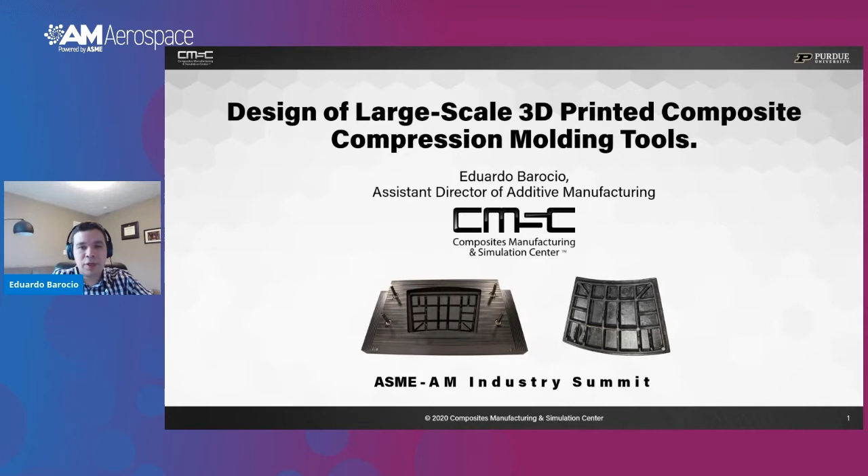Please take it away. Thank you so much for the introduction. So today we'll be talking about the application of large-scale 3D printing composites for compression molding tools. So once again, my name is Eduardo Barocio. I'm Assistant Director of Additive Manufacturing at the Composites Manufacturing and Simulation Center at Purdue University. And I'm really happy to share the outcome of this project with everybody today.

So just a brief introduction of who we are at the Composite Manufacturing and Simulation Center. We are the design, modeling, and simulation technology area for IACMI, the composites institute. We have capabilities for both experimental characterization as well as lab scale manufacturing processes for different composite manufacturing techniques. And we have project partners all across the automotive and aerospace industry.

So today, we're going to be looking at this case study of a compression molded blocker door. For some of you who don't know what a blocker door is, that's basically part of the thrust reversing system in a jet engine, so that helps redirect the flow to slow down the plane. So we can see here a legacy metal design. This component is hinged on one side and then it's actuated at the middle to redirect the flow.

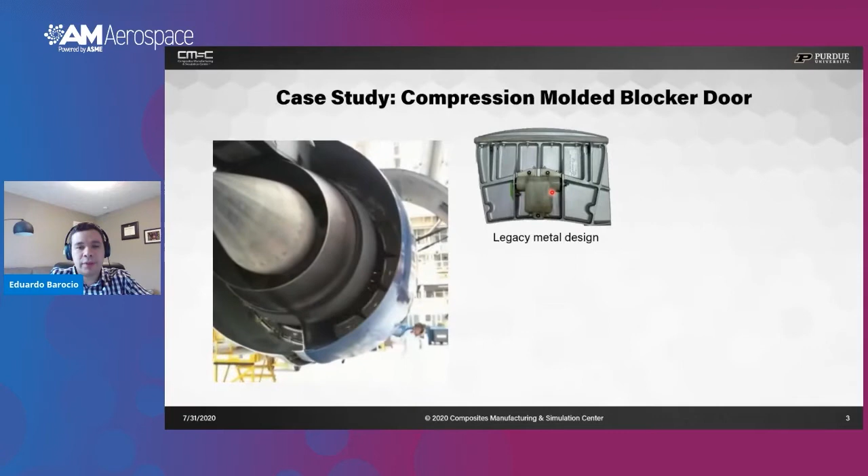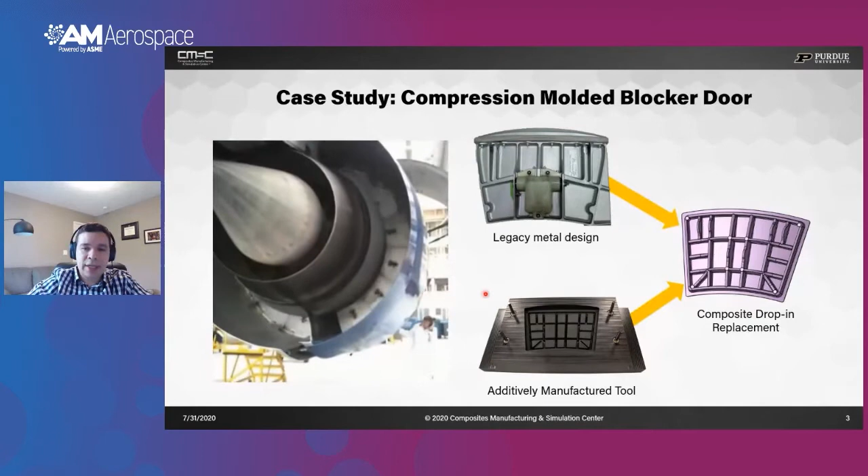So basically, the component is subjected to wind loads, and that made this type of application suitable for compression molding or a drop-in composite made by compression molding of PPMC, or prepreg platelet molding compounds. So in order to produce this part in composite, we need a double-sided tool. In this case, we see the negative side of an additively manufactured tool.

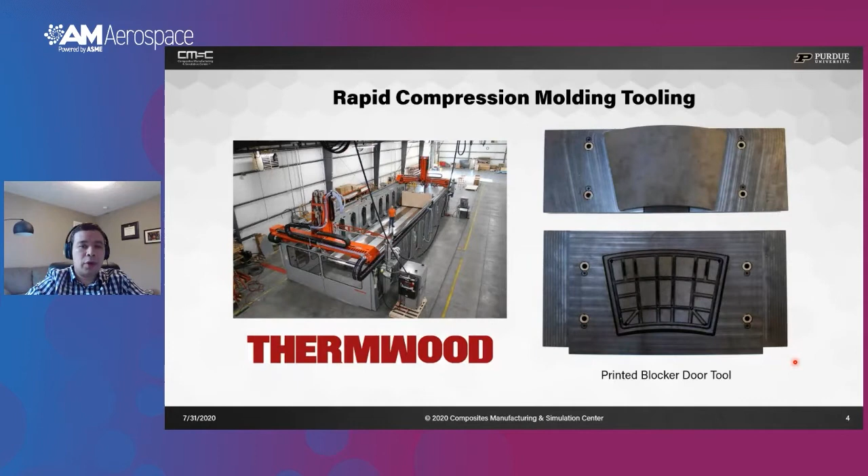This tool was produced in the LSAM system by Thermwood. We can see on the right-hand side the negative tool, and on the upper right-hand side the positive tool. We can see also some indexing rods used for the alignment of both tools. And throughout this presentation, I'm going to walk you through the process that we follow to design not only the molding tool, but also the molding process, driven by digital twins.

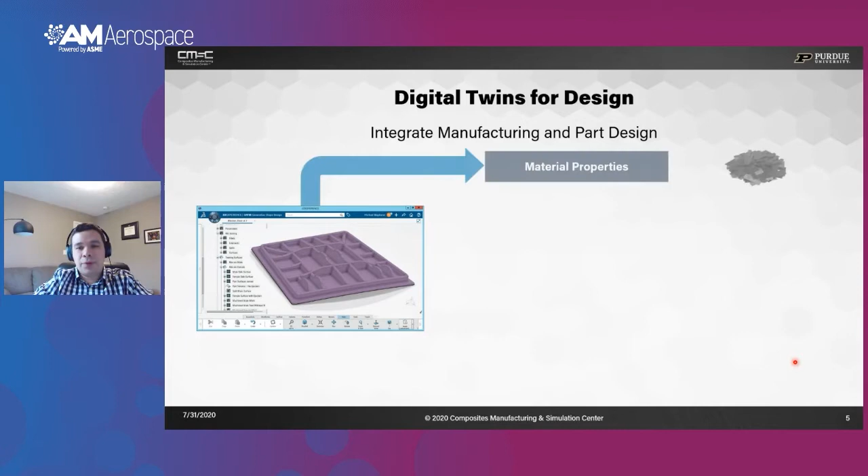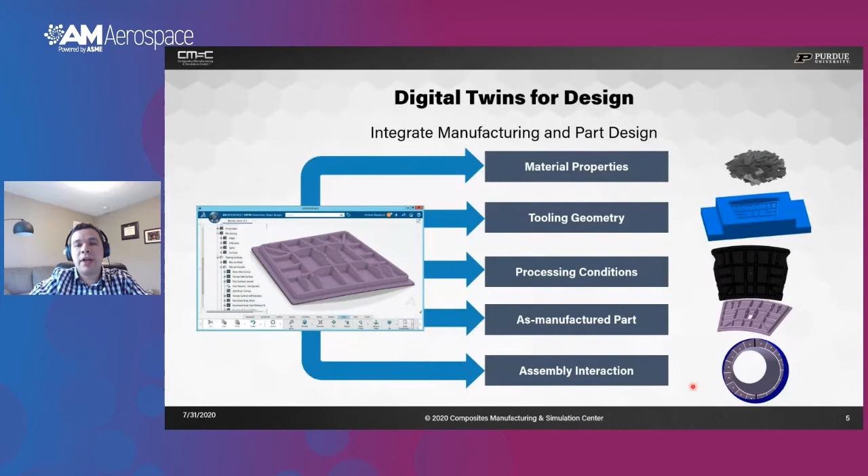So as part of our work at CMSC, we have developed digital twins to support the design process and integrate those to drive the design process for composite materials, which starts with the material properties, comprises the tool geometry, the processing condition. Then we can evaluate the performance of the manufactured part, considering the effects of manufacturing, and then analyze how the part will perform in the intended assembly.

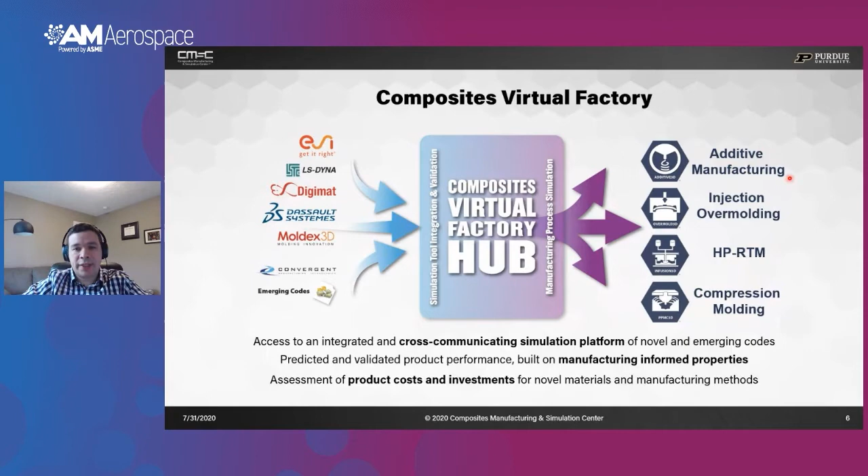So as part of that strategy, we have developed the Composite Virtual Factory, in which we integrate different commercial codes as well as emerging codes and custom developed codes into process-specific applications that allow us to simulate the manufacturing process, for example, additive manufacturing, injection overmolding, high-pressure RTM, or compression molding. So these are some examples of those integrated workflow applications.

So we'll be looking primarily today at the additive manufacturing workflow that incorporates a geometry piece of software, which is in this case CATIA, then the slicer, that is Simplify3D, then e-Xstream Digimat that provides some of the input material properties, and then Abaqus by Simulia, which is the primary tool used in our process simulation.

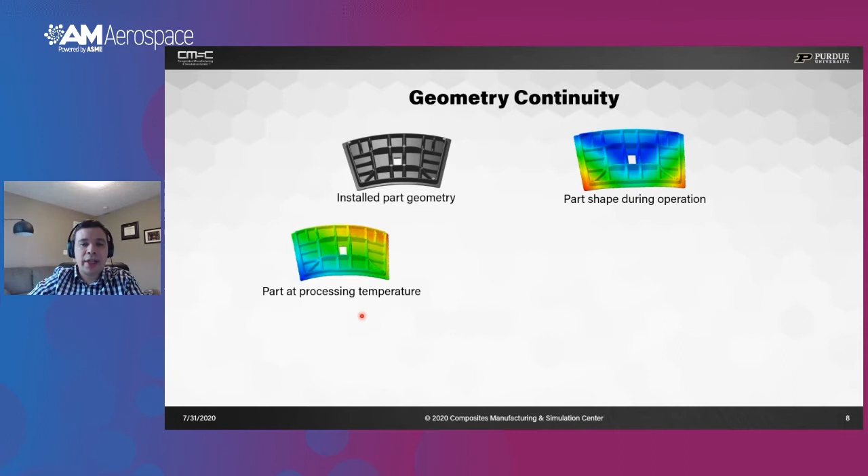So also having this digital thread of the manufacturing process allows us to have a continuity across the different geometries. For example, the different geometries we'll have in this example include the nominal geometry of the part that we need to produce, but we also have changes in shape when the part is subjected to the wind loads or is under operation. We also have a different shape when the part is manufactured and is still at the processing temperature inside the mold.

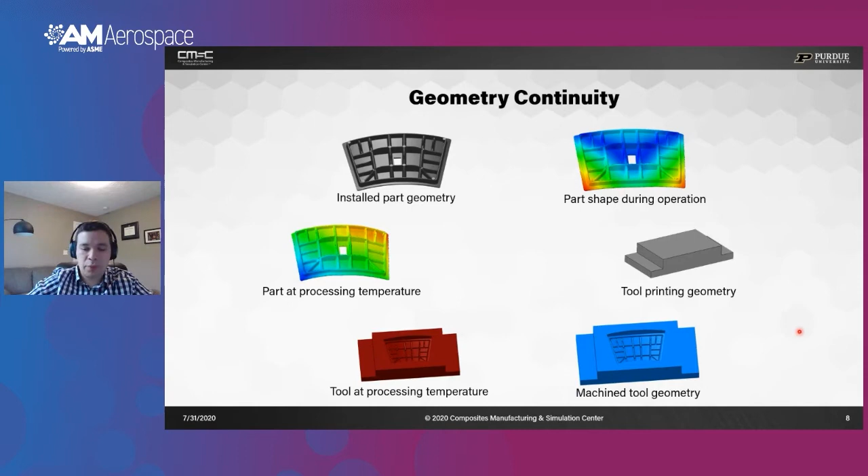And on the other side, for the mold, we also have a different mold shape. One, for example, is when the mold is at the processing temperature of the thermoset system used for making the part. We also have the mold shape with a nominal dimension and the geometry that we use for printing. So in this case, all this geometry continuity is satisfied through CVF Hub and the different simulation workflows that we have developed.

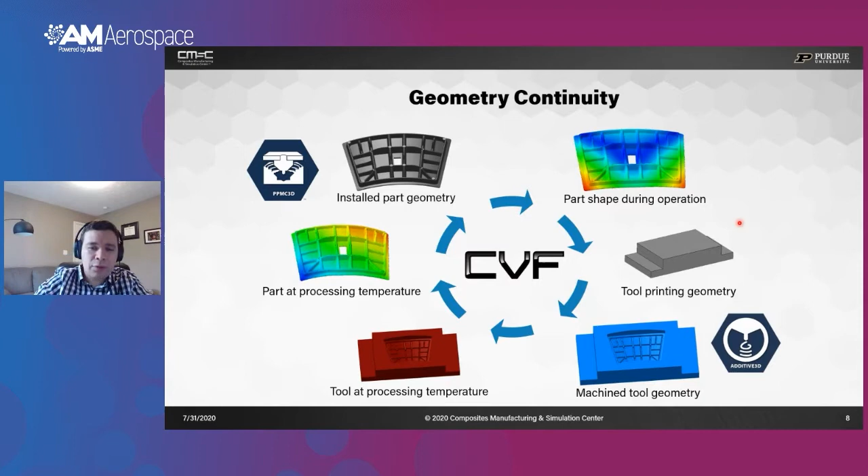So for this particular example, we use PPMC 3D, which is for the molding piece of the problem, and we also use Additive 3D for driving the design of the printed tool. So our focus will be primarily on Additive 3D. So going a little bit under the hood of what is in Additive 3D, basically there are two key components to start with.

One is the AM system card that contains all the characteristics of the printer, such as boundary conditions, how the deposition strategy affects the orientation of the fibers within the printed bead, etc. And that feeds the material card. So the material card provides all the material properties that are required for performing not only the simulation of the printing process, but also to analyze the performance of the printed part.

So as part of the process simulation, basically it's a physics-based process simulation. We start with the geometry, then that is transferred into the slicer where we discretize that geometry into a set of layers and individual beads. Then as an outcome of the slicing, we get the machine code that is used for driving the system. In our case, the same G-code is going to be used for driving a sequentially coupled thermomechanical analysis.

So we first solve a heat transfer analysis to solve for the temperature, for the bonding between layers, for crystallinity in the case of printing with a semi-crystalline polymer, etc. And then we pass that into a stress and deformation analysis. So we can then go through this loop to come up with either a geometry or a slicing strategy that will mitigate large deformations or excessive stresses that can lead to delamination or to failure of the printed part.

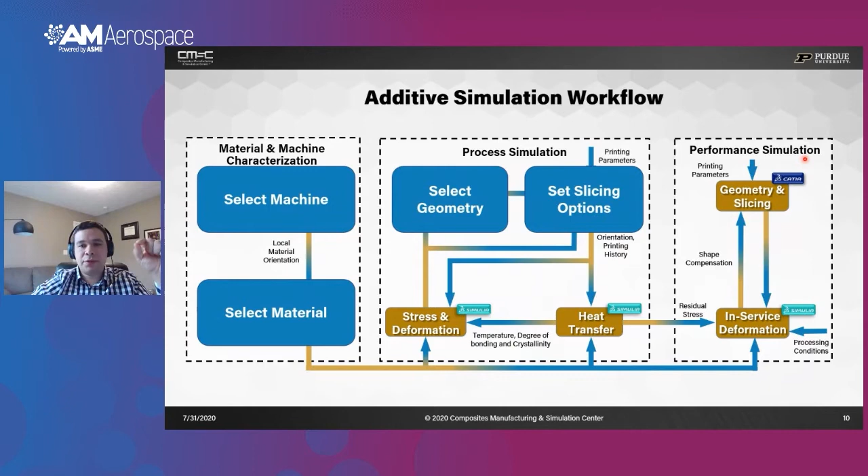Or we can also carry out a performance analysis to analyze the heating and cooling of the compression molding tool. And we will talk a little bit more about that. So we have made efforts to simplify this simulation workflow, to the extent that you can focus only on selecting the machine, the material, the geometry, pick your slicing options or slicing flavors, then run the analysis, and then just focus on reviewing the results without going into all the details of what's under the hood of the simulation workflow.

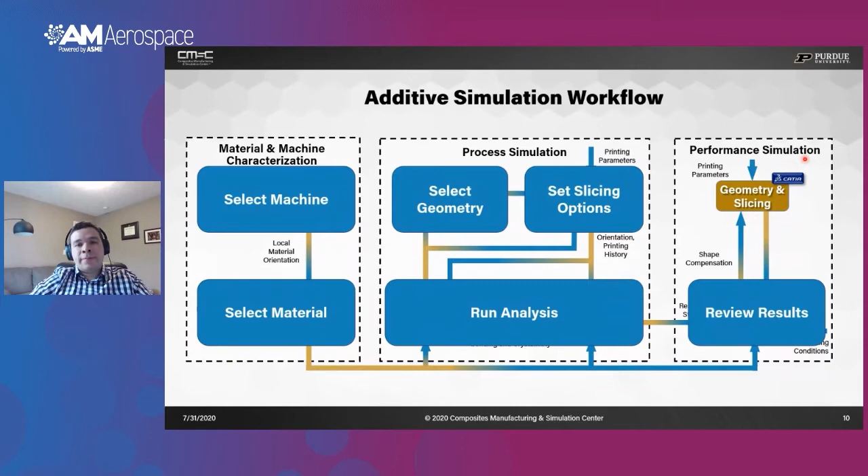So in terms of the technology behind the simulation workflow, our primary tool here is Abaqus from the SIMULIA brand, from Dassault Systèmes. So we use the machine code output by the slicer, transformed into what we call an event series, to activate elements in a finite element mesh. And we capture multiple phenomena that develop simultaneously during the printing process, including anisotropic heat transfer, polymer crystallization and melting in the case of semi-crystalline polymers, and interlayer bonding.

We even capture local convection coefficients or conditions that develop inside the different printers, and the heat removed by a compactor, either a roller or a tamper, used for consolidating the printing material. There is heat removed by the action of the compaction mechanism, so we can account for that. But at the same time, we also capture the anisotropy in the shrinkage and in the viscoelastic behavior of a printed material. So this is important in order to capture the physics that underlie this manufacturing process.

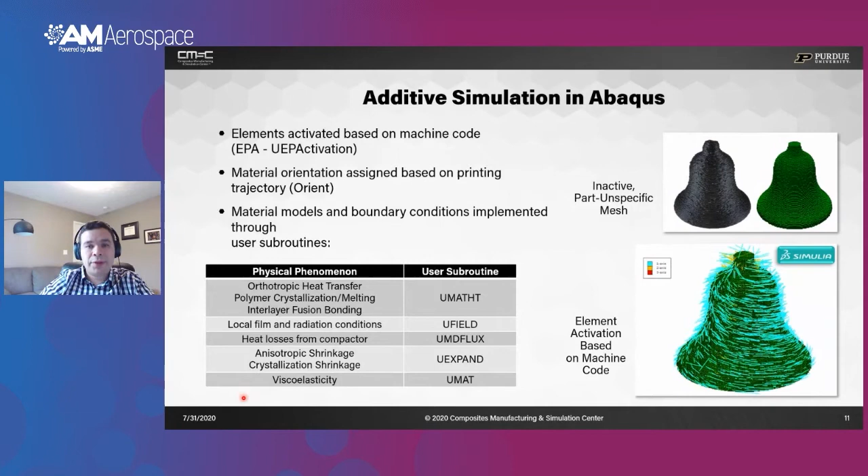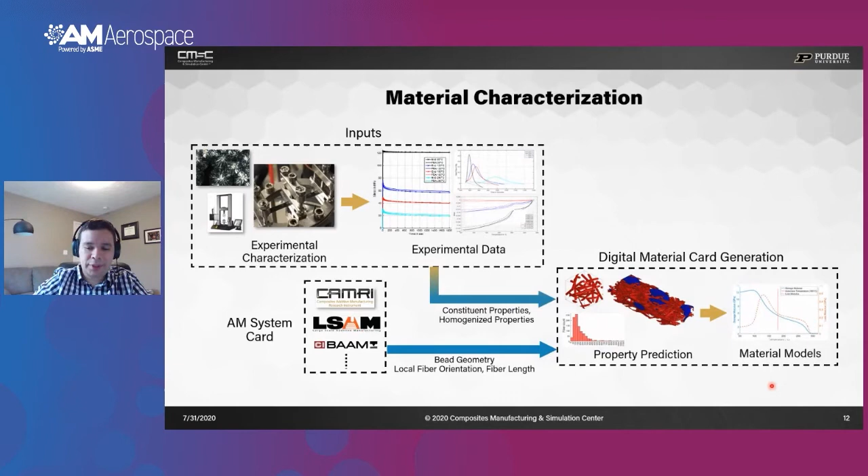So going a little bit into details of the material inputs that we need to create the digital material card. We combine both experimental characterization with virtual characterization to generate the inputs for the different material models that we use in our physics-based simulation workflow.

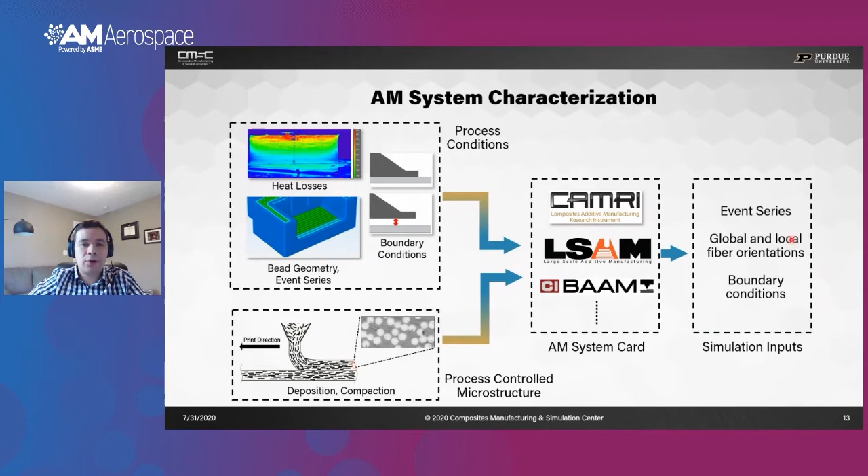And in terms of the system card, we also need to consider the different conditions developed inside the printers. For example, how the part is attached to the substrate, the heat losses developed inside, how the bead deposition strategy is performed, and how that affects the fiber orientation distribution within the bead. So that feeds into the system cards, which we have developed for CAMRI, which is our system that we developed at Purdue, as well as commercial large-scale systems like the LSAM and the BAAM from Cincinnati. So this provides some of the inputs that we need for the simulation that are specific to each machine.

So now looking at the workflow for designing this tool with Additive 3D. We will be looking here on the right only at the negative side of the tool. So this is the geometry of the nominal shape. This is basically a simplified geometry which was 3D printed, and then we perform the 3D printing simulation.

And then after simulation, in this case simulation of the printing process, we simulate the process of removing material due to the machining, and then we look at the performance. In this case, we are concerned about ejecting the part from the mold as well as the heat transfer characteristics. Just to give a brief overview of how the process performed.

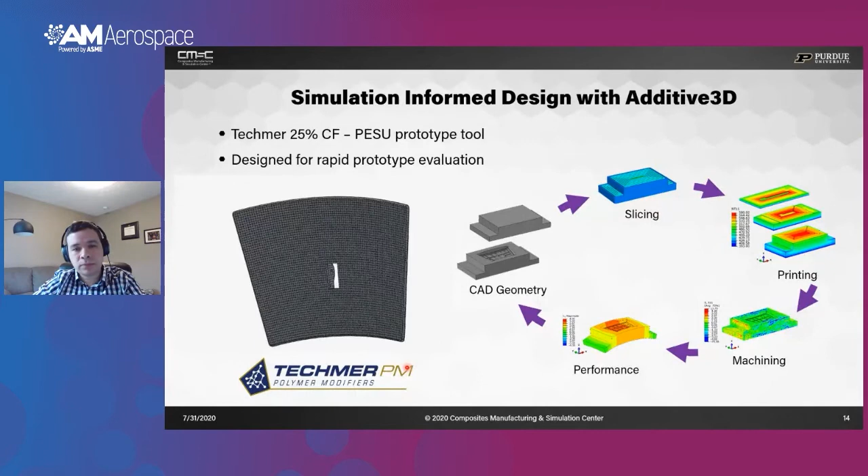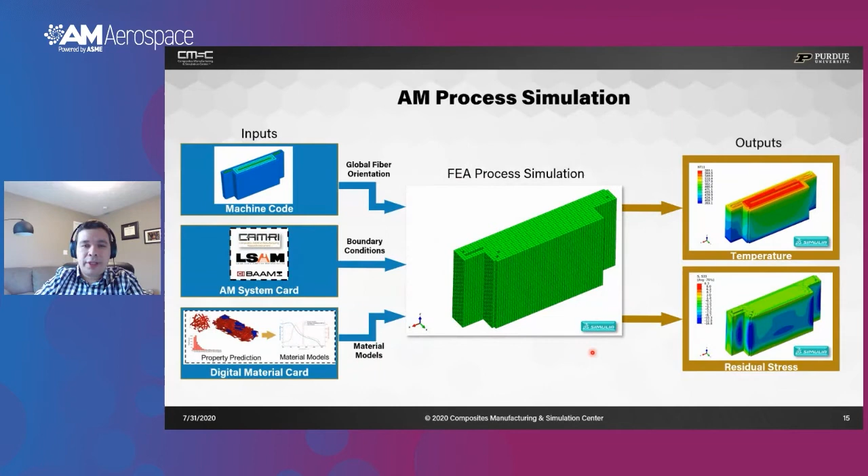So now looking first into the process simulations. As inputs, we need the machine code that was output by the slicing. We just select our system card, the material card, and we can perform the 3D printing simulation. We can see an example of the simulation results here. On the left-hand side, we can see the temperature. On the right-hand side, we can see the stresses, in this case in the stacking direction.

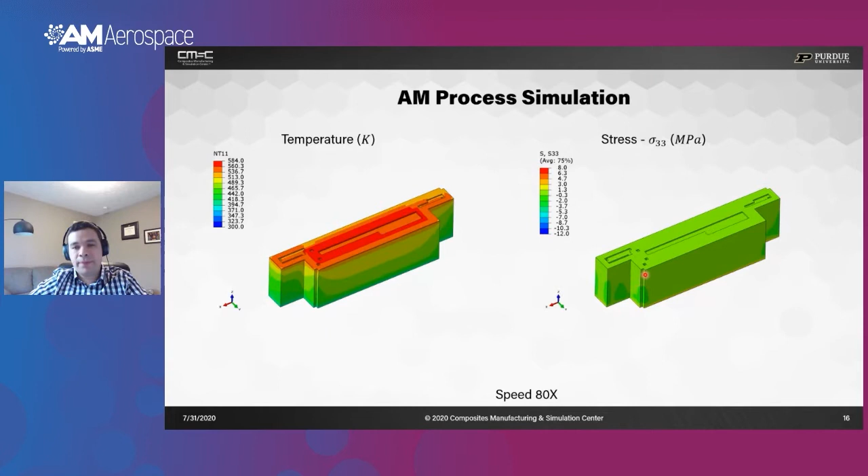We are concerned about the stresses that might develop during the printing process and cause delamination or failure of the part. We can see here in temperature, the process is highly non-isothermal. The bottom is cooler than the top, and the material cools down as it is deposited layer by layer. Those temperature gradients lead to residual stresses, as well as the anisotropy of the printed material.

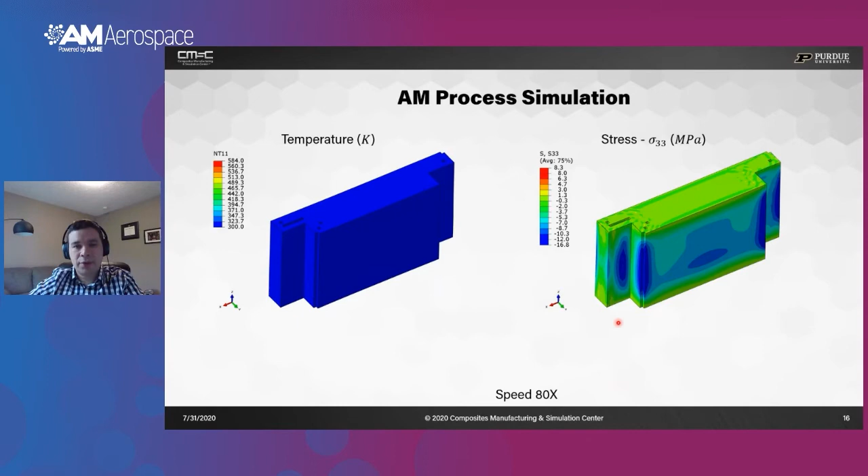So we can see some stresses developing at the bottom. Then once the part is released from the build plate, some stresses also develop. And then upon cooling to room temperature, different stress states develop. But mostly it's under compressive stresses, which is not really critical for this application. So we will now focus on the effect of the different printing configurations.

We can certainly print this part in a horizontal configuration or in a vertical configuration. But since the printing direction affects how the material is oriented, the properties of the printed material and the performance of the printed geometry, we want to ensure that in the loading conditions we have, both in molding and once we eject the part, we don't compromise the integrity of the tool.

So following the printing process, we perform a stress analysis considering these two print configurations. On the upper side, with the tool printed vertically, during the ejection process we don't get significant stresses that can cause delamination. However, with the other printing configuration, we can have stresses localized in this transition that can lead to delamination. Therefore, this was the choice for the print configuration.

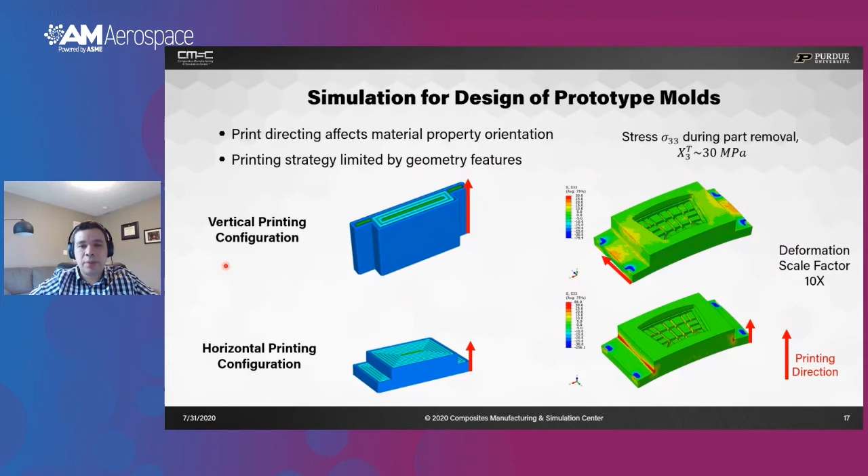Now, the next challenge is to heat up the tool to the processing temperature of the material system we want to compression mold. Even though we have a 25% carbon fiber reinforced polymer, the thermal conductivity is still relatively low since it's governed by the polymer, so it's not as straightforward to reach these processing temperatures as in traditional tools. The material system is PESU reinforced with 25% by weight of carbon fiber, with a Tg of around 212 Celsius.

The material we use for the compression molding is provided by Dow and is Vorafuse. It's a carbon fiber PPMC, processed at 150 Celsius or 300 Fahrenheit. The molding conditions we need to produce this part are 10 megapascals at the same processing temperature, so around 1500 PSI. This is a fast cure system; it only takes around 5 minutes to cure a part.

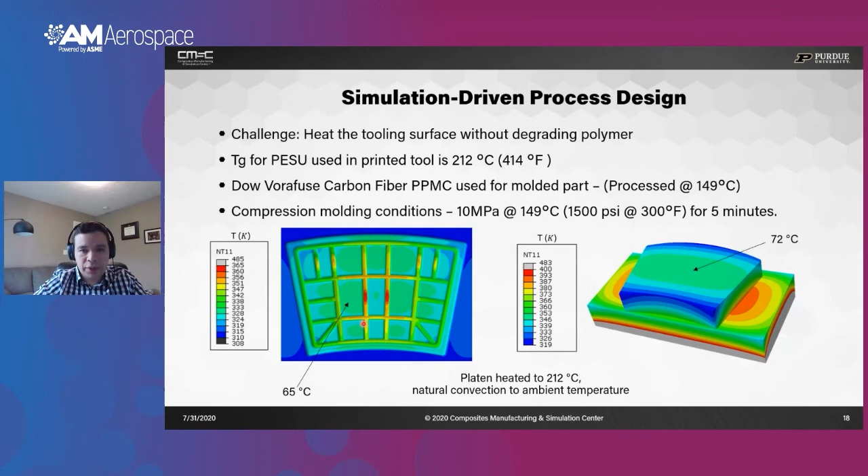This is one of the analyses we perform to inform the manufacturing process. If we heat up the tool only relying on conduction from the platen and natural convection, we can barely reach 72 Celsius at the top and 65 Celsius at the top of the negative tool, so we need to think a little out of the box to reach the processing temperature. So we evaluated different options.

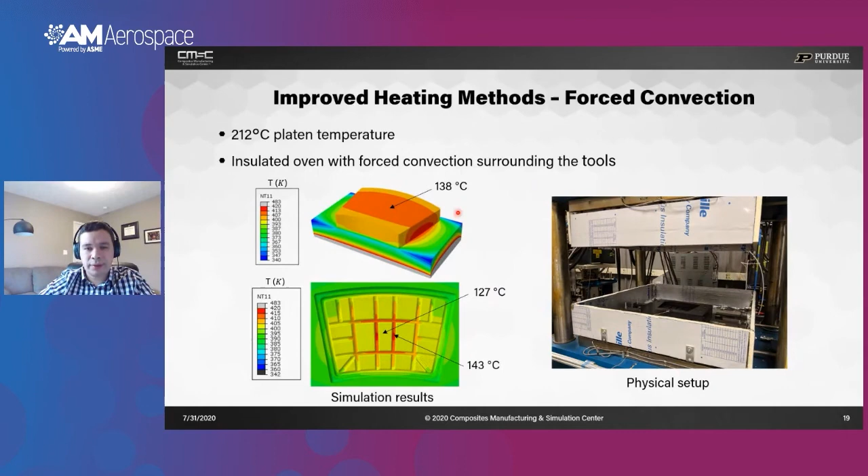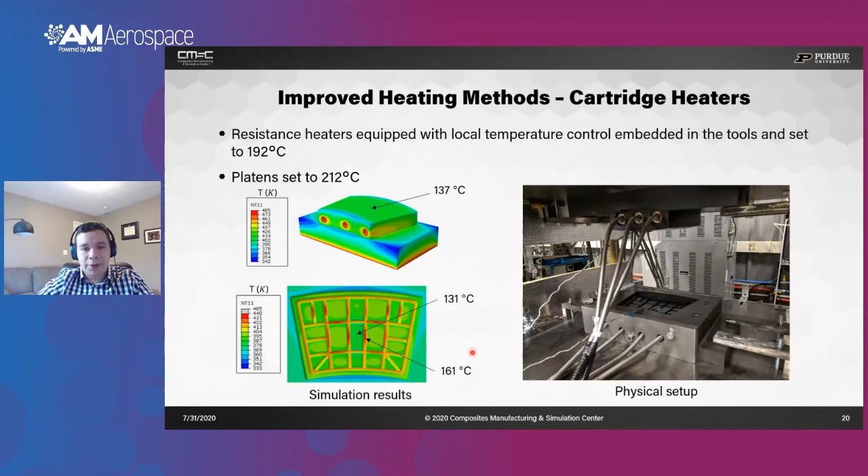Another option was enclosing the hot press and introducing forced convection conditions inside. By doing so, as you can clearly see here, we can reach higher temperatures. A third consideration was inserting cartridge heaters with controlled temperature at each cartridge heater. With this approach, which was the one finally implemented by Thermwood, we were able to reach temperatures closer to our target processing temperature of 150 Celsius. So the chosen solution was using the heat from the platens in the hot press plus the cartridge heating.

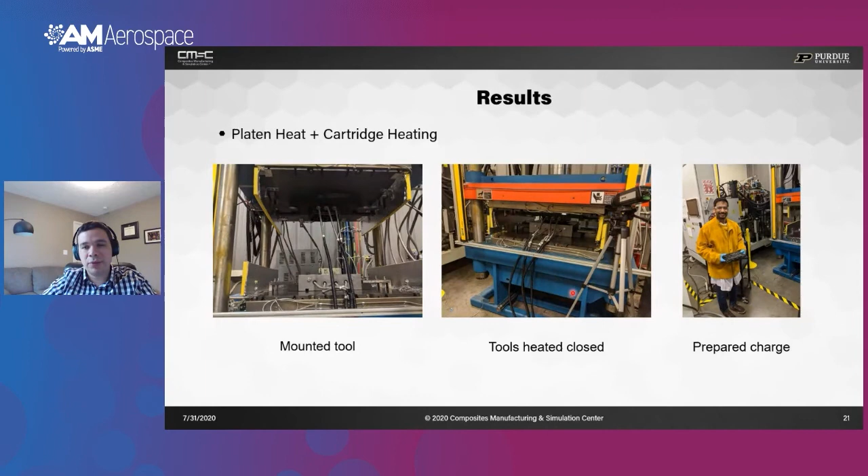So we can see here on the left, the tool mounted on the hot press. In the middle, we can see the tool being closed inside the hot press, and a thermal camera that we use for monitoring the temperature at the upper and lower sides of the tool. And then here, the molding charge being ready to be dropped in the mold. So prior to dropping the molding charge, we record the temperature at the top and bottom.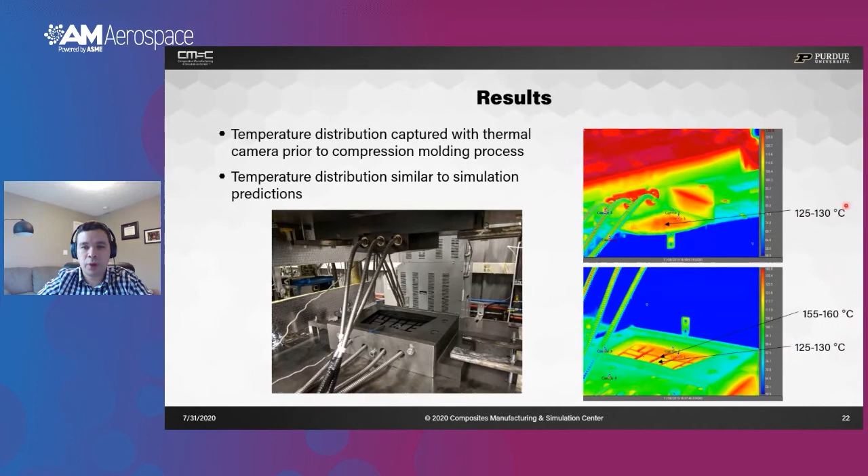You can see we're very close to the processing temperature, which is in fairly good agreement with what we predicted with our performance analysis. And we were able to successfully mold a blocker door geometry with this PPMC material. And after the molding process, the tool remained intact, with just minor signs of wear. So overall, the mold cavity was filled completely.

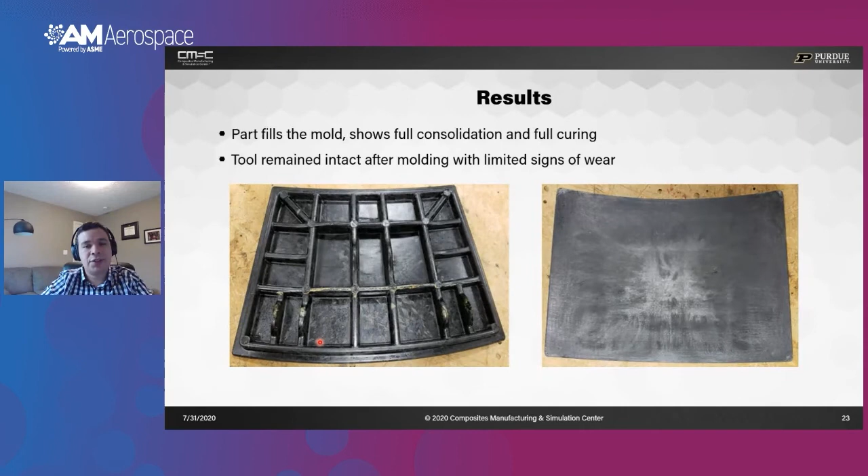There are some areas that are resin rich, but this was kind of the first trial we did, and these resin rich areas can be overcome by improving the processing conditions. But overall, the molding process was successful.

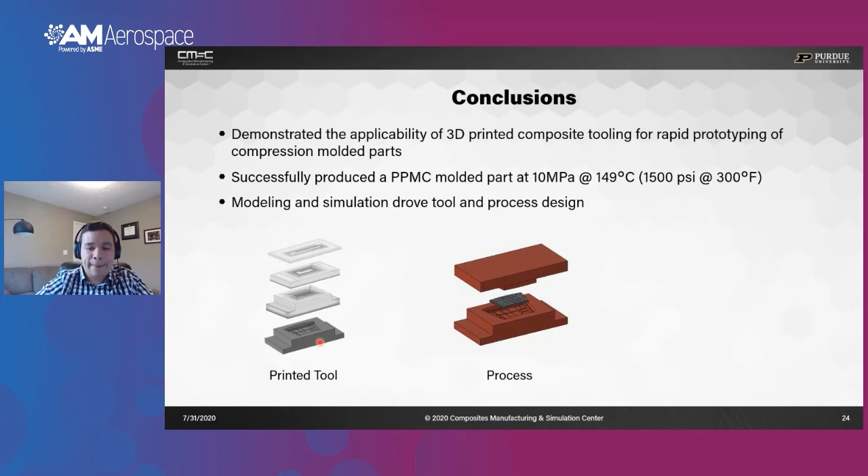And finally, as conclusion, we demonstrated the applicability of this 3D printed composite tooling for rapid prototyping of compression molding tools, and used simulation for guiding the design for 3D printing, so that we were able to demonstrate the compression molding tool produced by 3D printing to produce this blocker door geometry.

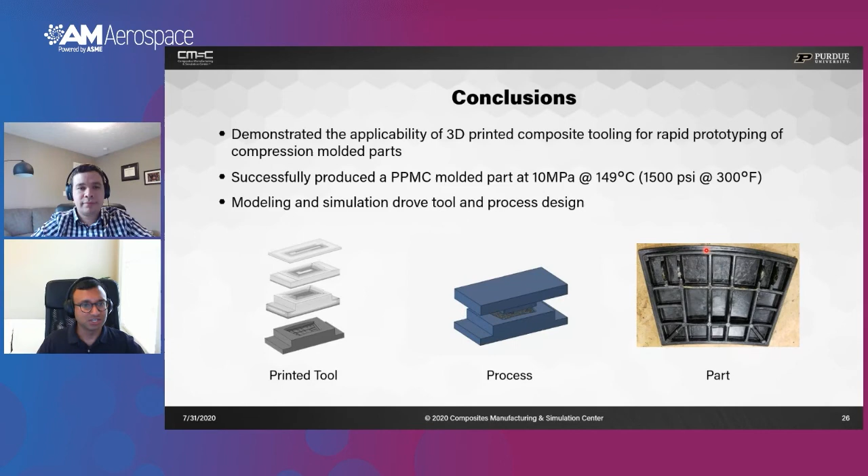Thank you, Dr. Barocio, for this very insightful presentation on the composite design. What are some of the next steps in your research? Do you have advanced steps planned to actually implement this into some sort of commercial solutions?

So we are currently extending the simulation workflow, Additive 3D, to capture different printing systems, because there are variations from printer to printer, even though you can use the same material, and variations that result from flow conditions that develop in the nozzle as the material slicks down, or even in terms of, for example, the substrate that is used for holding the part. Some printers use, for example, a sheet of plastic. Some other printers use an adhesive, and those have consequences on the deformation that can develop in the printed part.

So we are basically working on extending our simulation capabilities to capture those different specifics of the different commercial printers, and also on characterizing different material systems, so that we can offer different solutions in terms of material capabilities. And as I mentioned briefly, we are also working on making the simulation workflow more user-friendly, so that anyone can set up an analysis and just focus on selecting a printer, selecting a material, and be able to run a simulation.